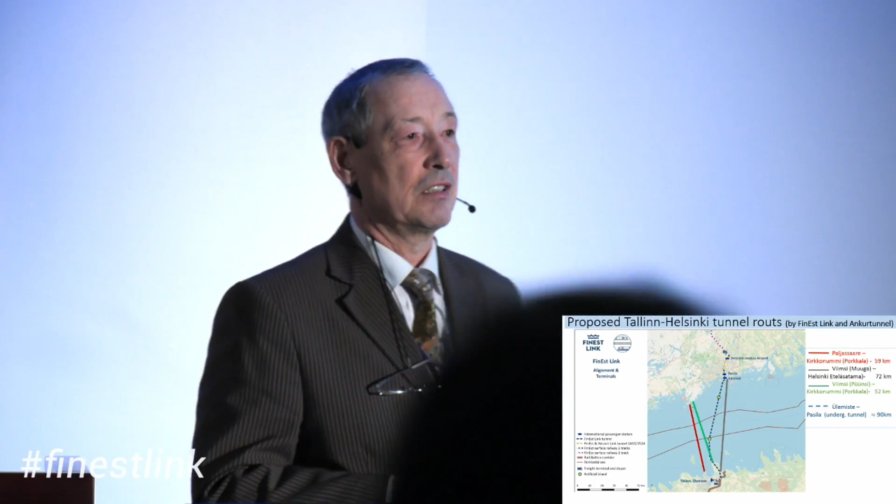And that's why I am trying to highlight some points of the submerged floating tunnel, as you see. It is a submerged floating tunnel, and in other words, it is called Archimedes Bridge. Who knows? And why prefer the submerged floating tunnel? Why? First of all, it can be much shorter than usual bored tunnels in the ground.

I have some calculations here. If we go from Paljassaare, the second option, to Kirkkonummi, it will take 59 kilometers. And from Viimsi, nearby Muuga, it takes 72 kilometers to reach the other shore. And from Viimsi-Püünsi to Kirkkonummi, the green one, it will take only 52 kilometers. And of course, this proposed tunnel is much longer; this real tunnel is about 90 kilometers.

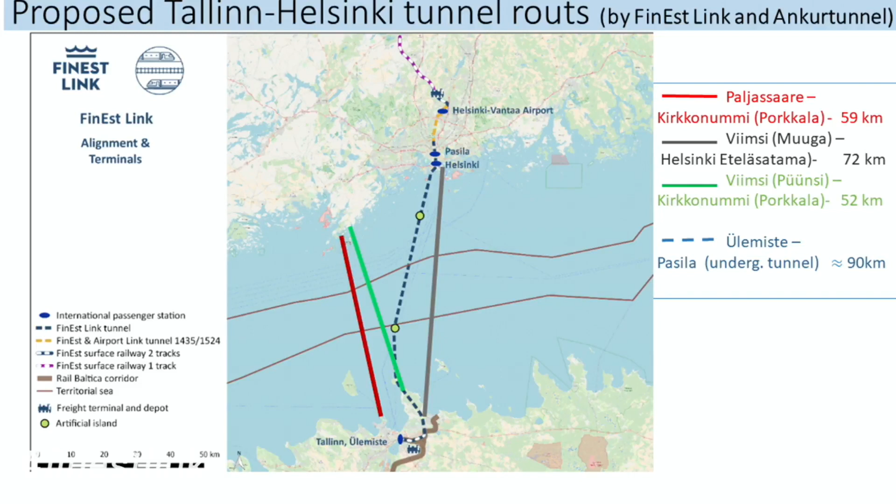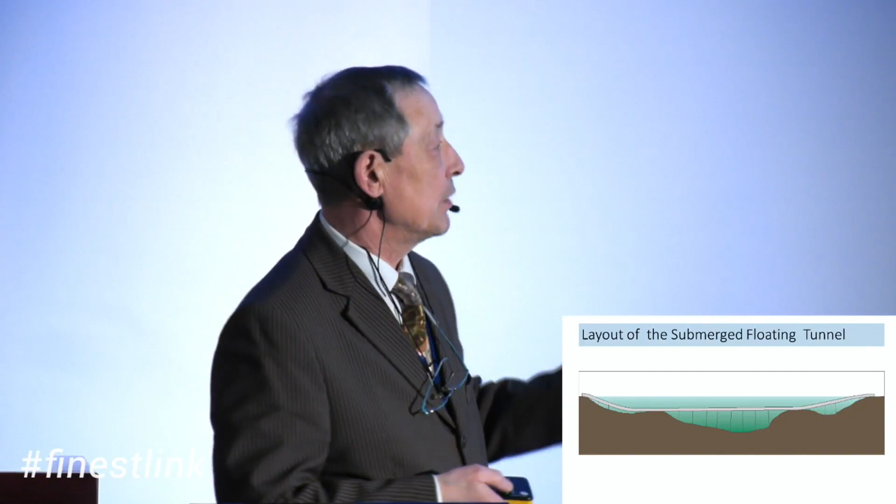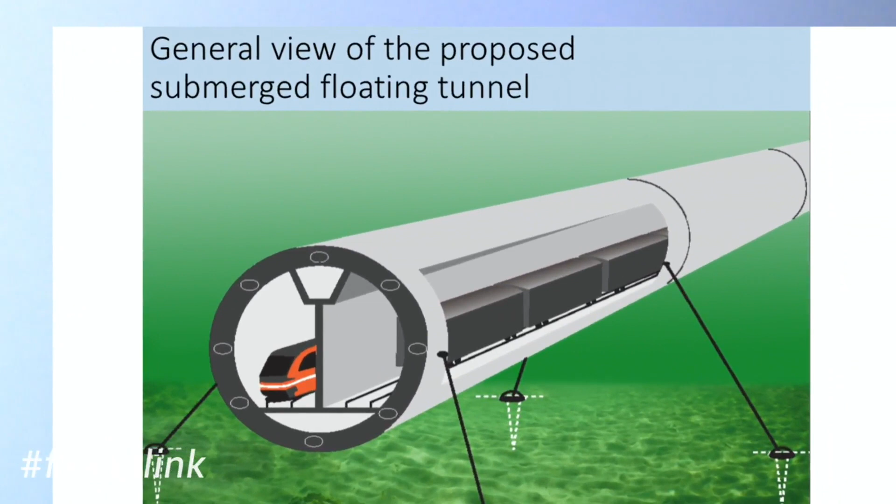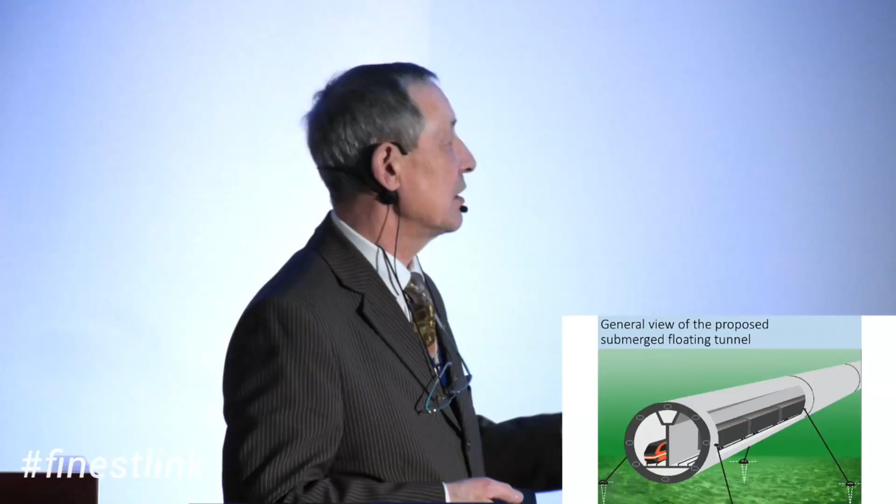This is the general layout of the submerged floating tunnel. It's anchored to the bottom and lies below the water, about 40 meters, but not completely near the seabed. In the general view, an artist's drawing, we can see reinforced concrete modules which create two separate ways, one to Finland, one back, for both passenger and cargo traffic, and a separate tunnel for maintenance and also for escape matters. To fight against buoyancy, the tunnel is anchored to the sea bottom.

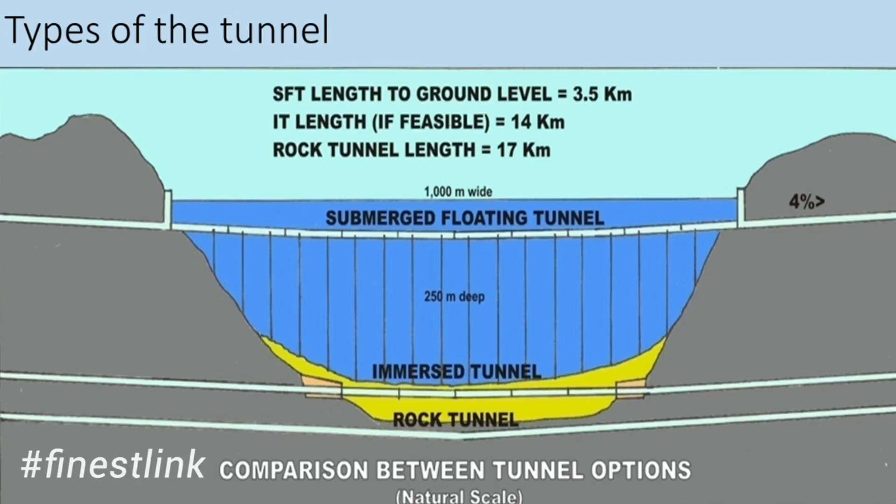I can explain a little bit the difference between the submerged floating tunnel, it's here, the immersed tunnel, it's on the seabed, and the rock tunnel, which is generally planned now. All of them are, of course, underwater tunnels, and there's always the danger of being flooded. And why are underwater tunnels not well known yet?

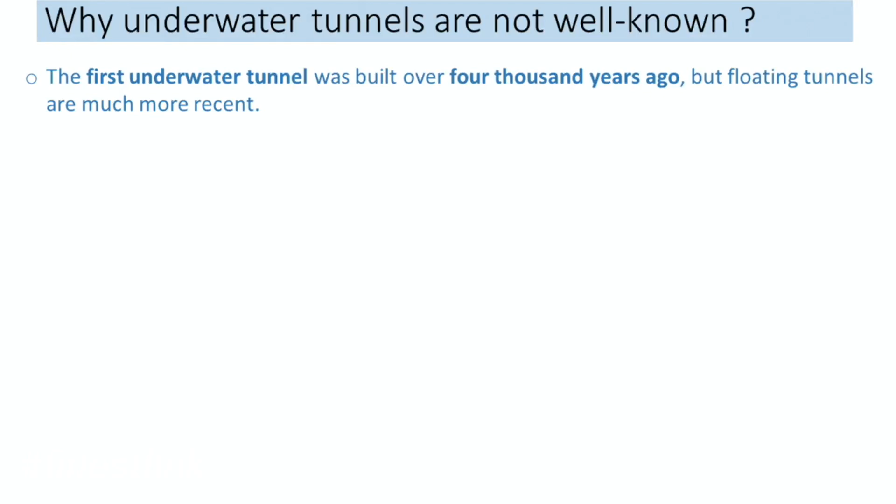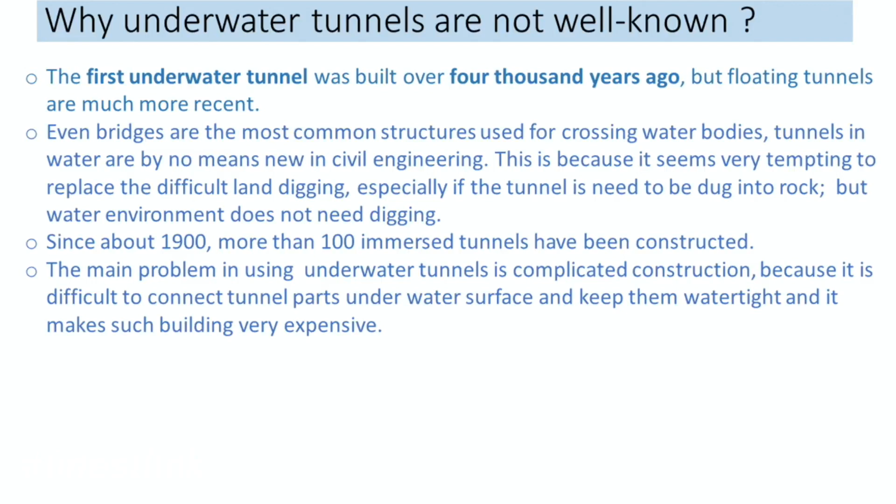The first underwater tunnel was built over 4,000 years ago, but floating tunnels are much more recent. Even though bridges are the most common structures used for crossing water bodies, tunnels in the water are by no means new in civil engineering. It seems very tempting to replace difficult land digging, especially if tunnels need to be dug into rock, but the water environment does not need digging. Since about 1900, more than 100 immersed tunnels have been constructed, usually short ones. The main problem is complicated construction, because it is difficult to connect tunnel parts underwater and keep them watertight, which makes such building very expensive.

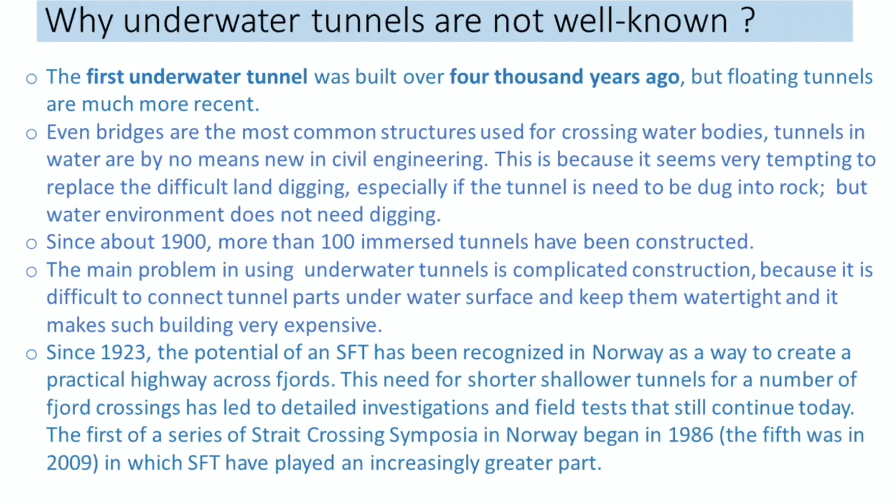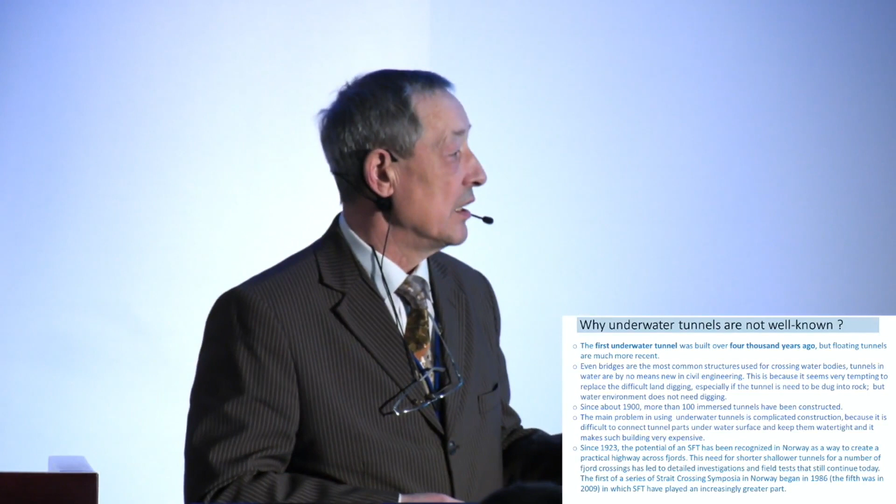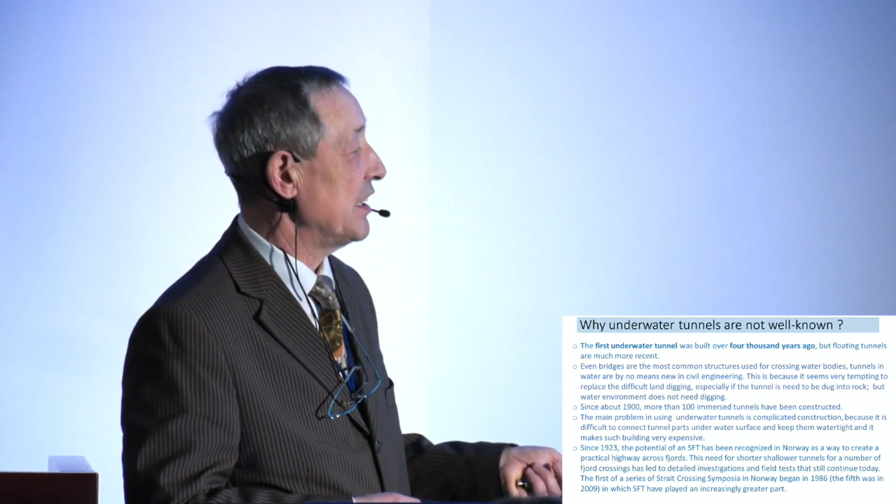Since 1923, the potential of SFT has been recognized in Norway as a way to create a practical highway across fjords. The need for shorter, shallower tunnels for fjord crossings has led to detailed investigations and field tests that still continue today. The first of a series of strait crossing symposia in Norway began in 1986. The fifth was in 2009, in which SFT played an increasingly greater part. Sorry, there are no Norwegians here. Probably they could explain.

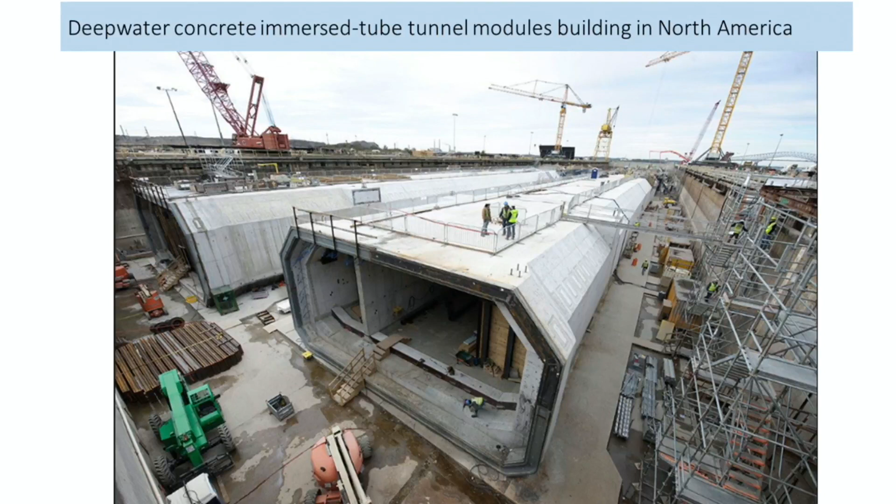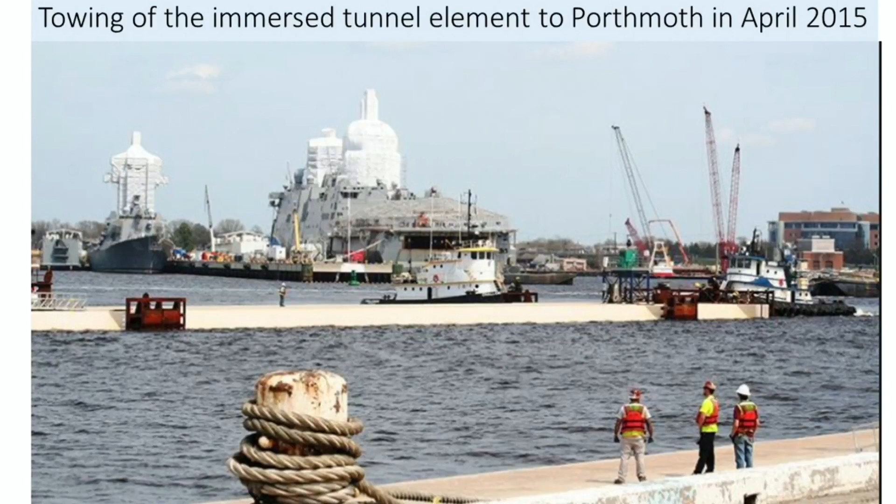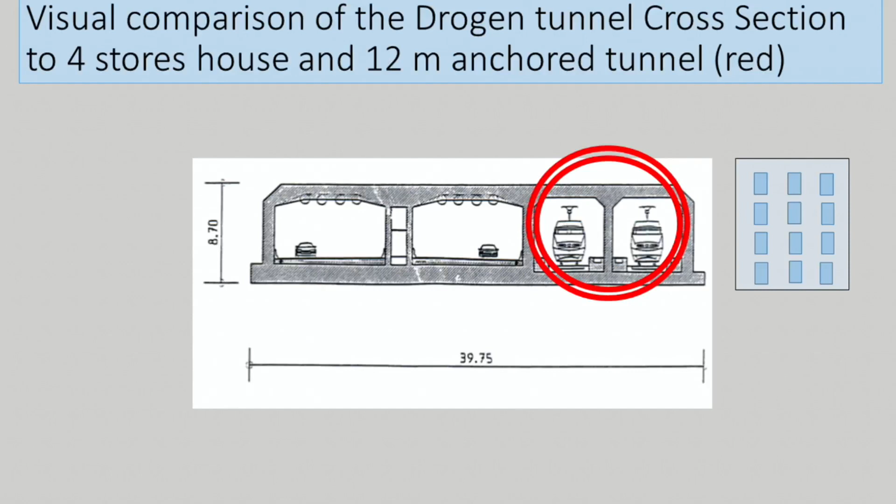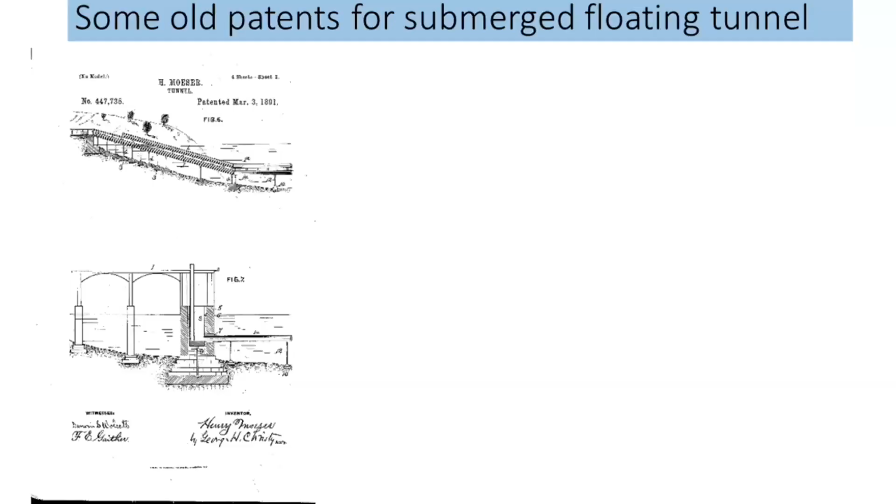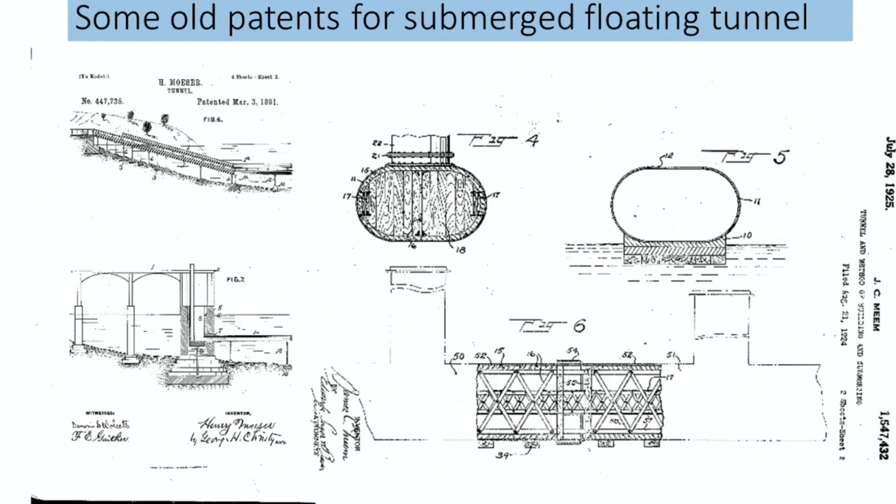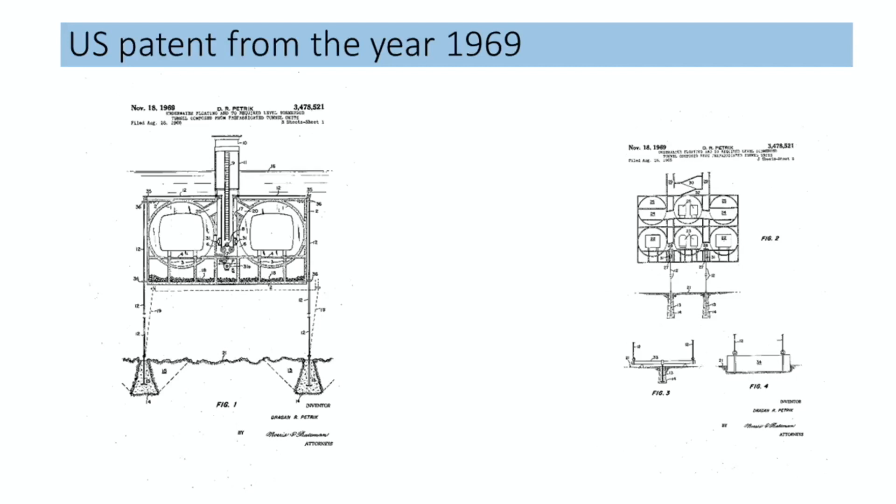Some patents for the submerged floating tunnel have been taken. From 1891 you have seen one of them, the US one, and the second one from 1925, turned a little bit. And the last from 1969 is something like what we are going to propose. And there's quite a difficult construction at the intersection.

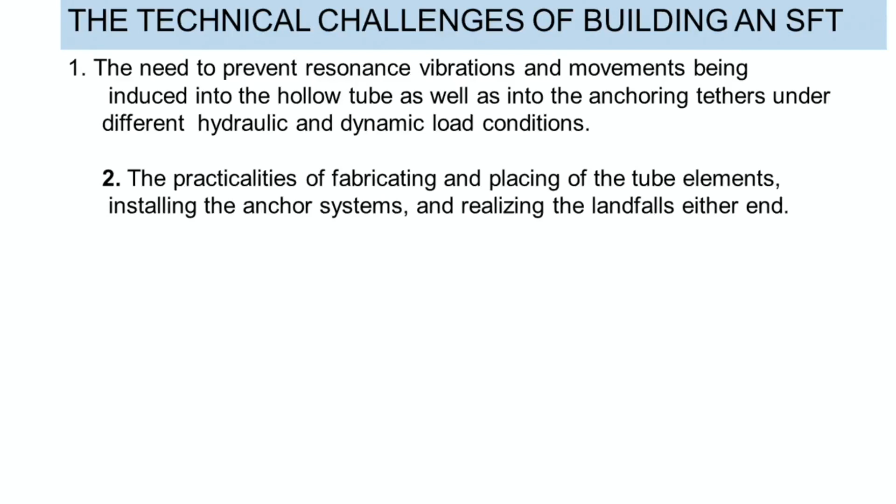The technical challenges of building SFT are, of course, the need to prevent resonance vibrations and movements being induced into the hollow tube, as well as into the anchoring tethers under different hydraulic and dynamic load conditions; the practicalities of fabricating and placing the tube elements, installing the anchor systems, and realizing the landfalls.

And maintenance and repair of submerged infrastructure, addressing the highly improbable but perhaps possible event of a submarine or sinking ship colliding with the suspended tube. Of course, anchoring, someone lowering an anchor onto the tunnel, that's the problem. And in general, public perception and operational safety: how to gain the confidence of the public and assure the safety of the infrastructure to the clients and the insurance industry.

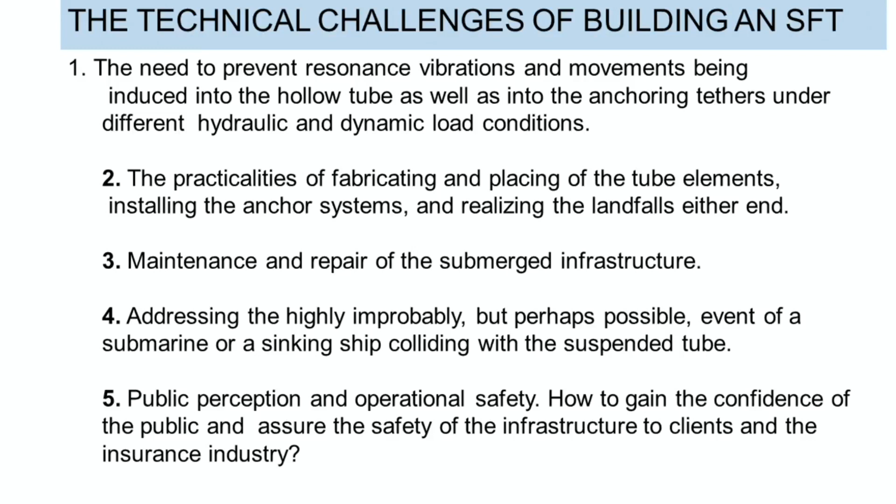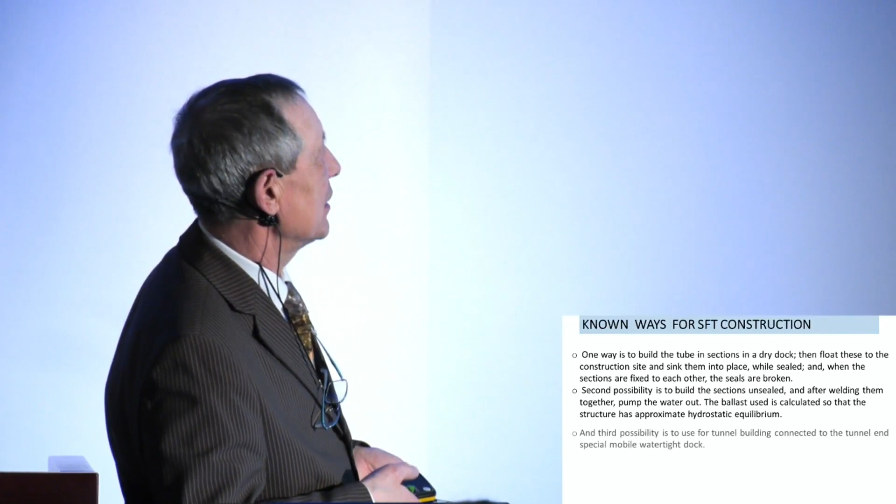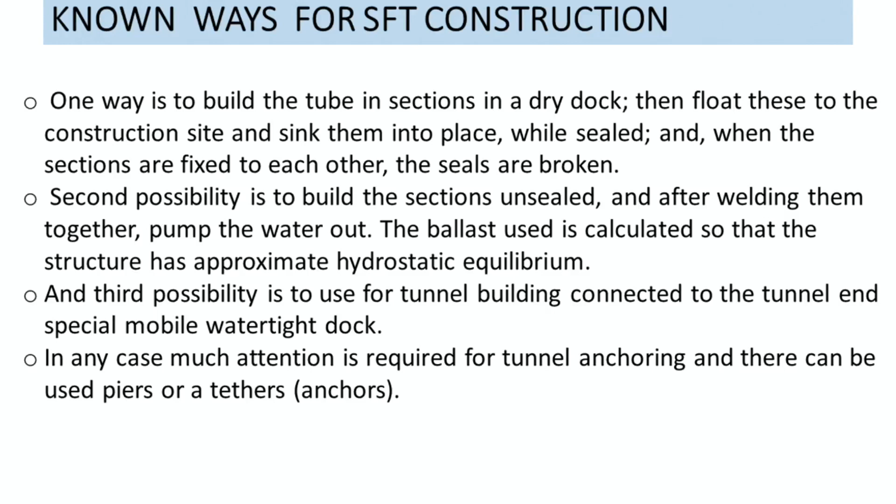Known ways for SFT construction. I have to rush, I will jump because the time scale is very tight. A third possibility is to use a tunnel building connected to the tunnel end special mobile watertight docks. It is also used. But in any case, much attention is required for tunnel anchoring, and piers or tether anchors can be used. And the last one, the best way, is to submerge the tunnel like a gas pipeline.

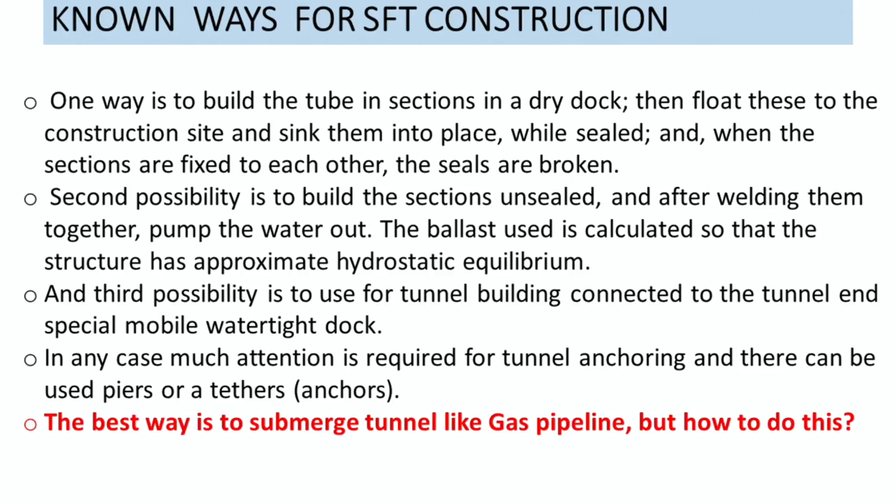Gas pipeline, but how to do this? It's different to submerge a steel tube 2 meters in diameter or a 10 meter or larger concrete tube. It's a question. And some known future projects of submerged floating tunnels.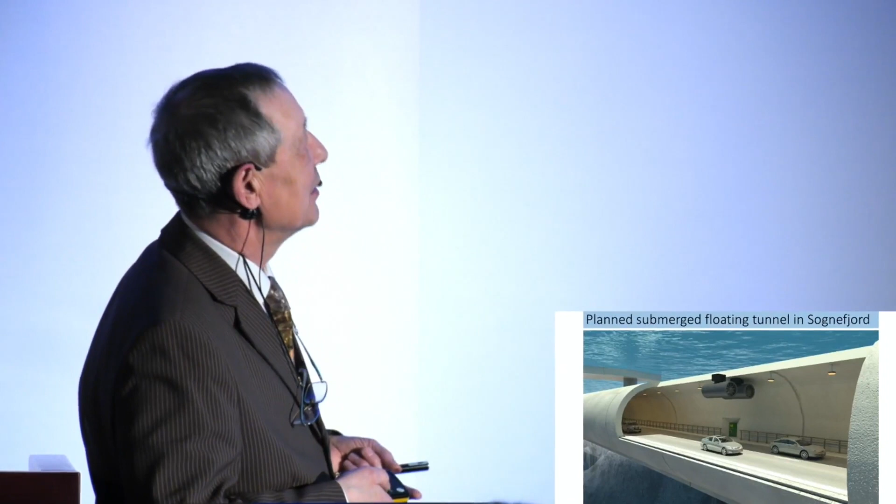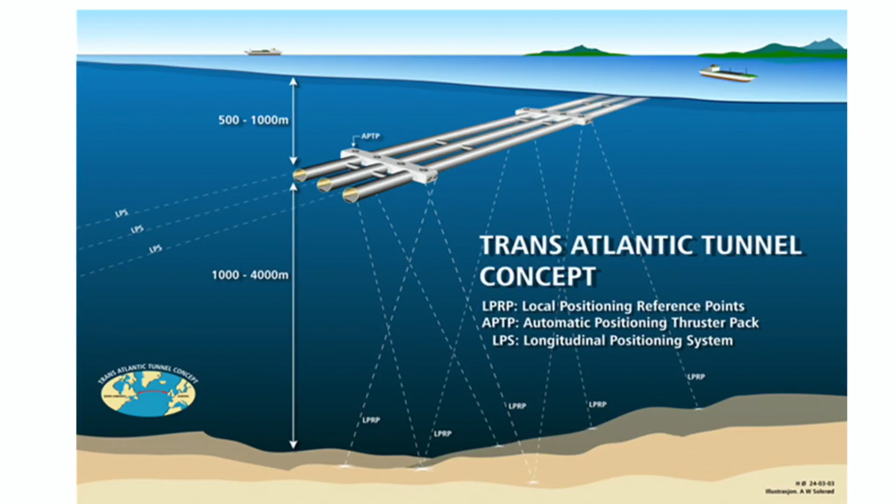I am explaining that I am not very fantastic here. The plan in Norway, on floats, anchored to the seabed, and even a transatlantic tunnel is proposed. You can see transatlantic from the UK to America. So those are ideas.

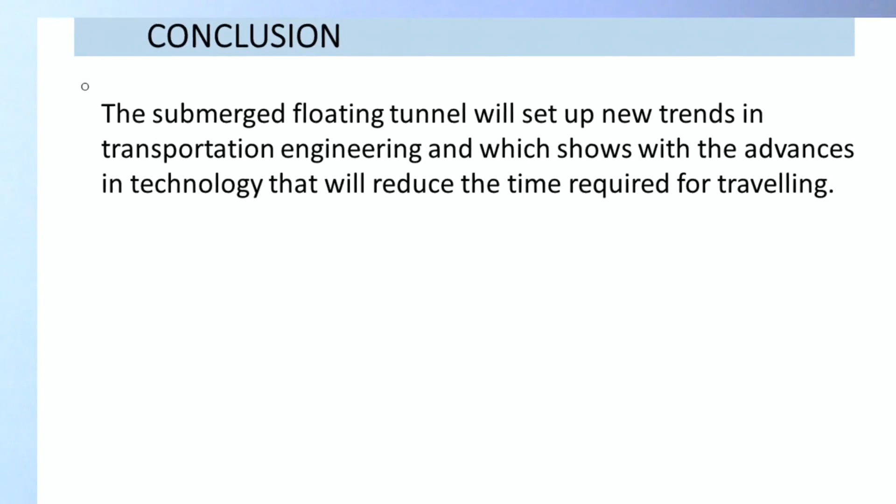Conclusion. This is not the full presentation, but the submerged floating tunnel will set up new trends in transportation engineering, and shows that advances in technologies will reduce the time required for traveling. For wide and deep crossings, a submerged floating tunnel may be the only feasible fixed link, replacing present-day ferries and providing local communities with new opportunities for improved communication and regional development.

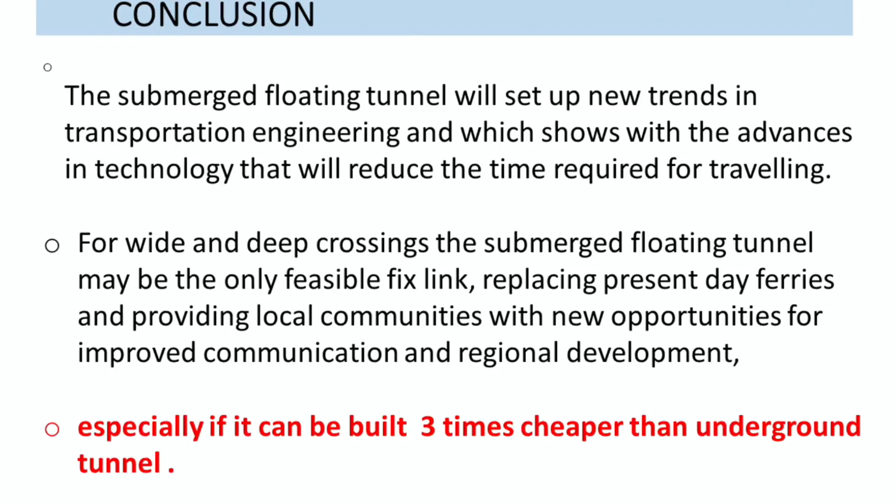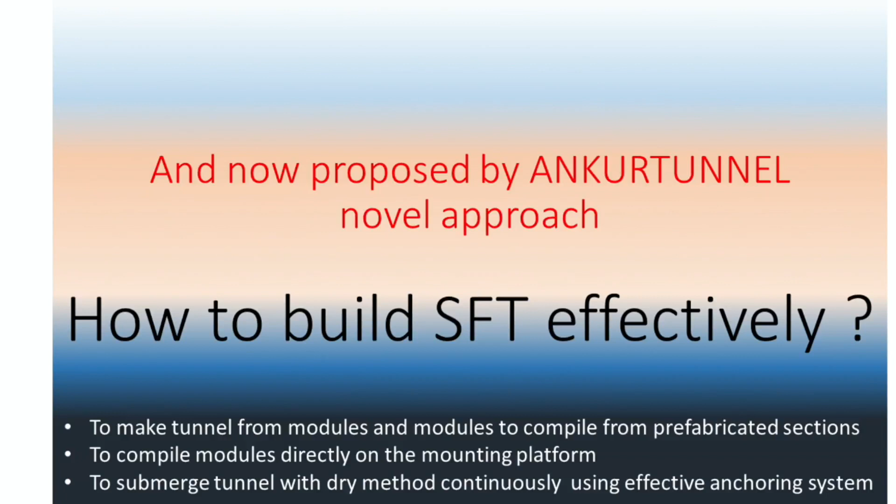And especially if it can be built 3 times cheaper than an underground tunnel. That's a point. And now a novel approach is proposed for how to build SFT effectively. First, to make the tunnel from modules, and compile modules from prefabricated sections. Second, to compile modules directly on the mounting platform. And third, to submerge the tunnel with dry methods continuously using an effective anchoring system.

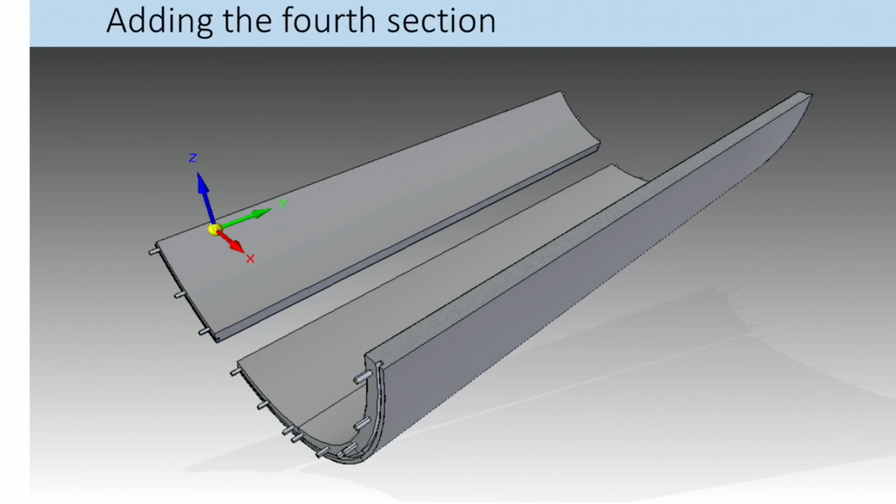And such prefabricated parts of a module. 5 parts, 2 sections to connect, 2 connected, 3 connected. Fourth section adding, 4 sections already, 5 sections together, 6 sections together, 8 sections, and a module with inner walls. It separates and makes 3 different tunnels in one.

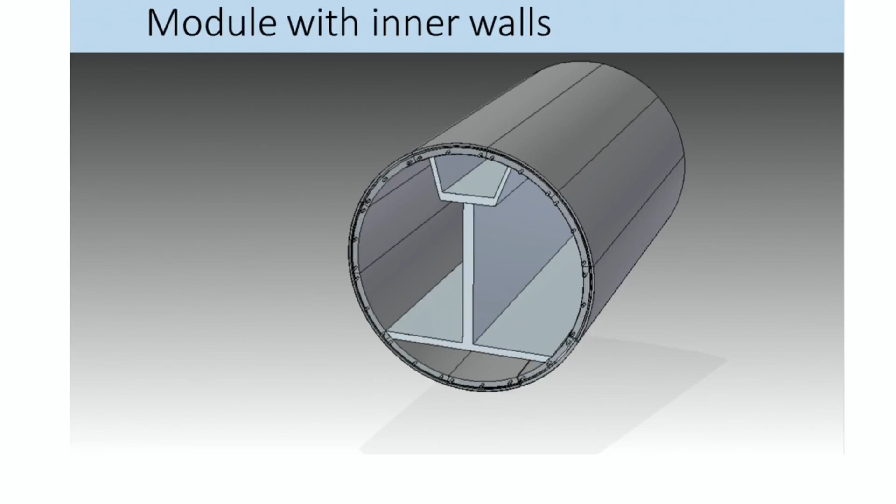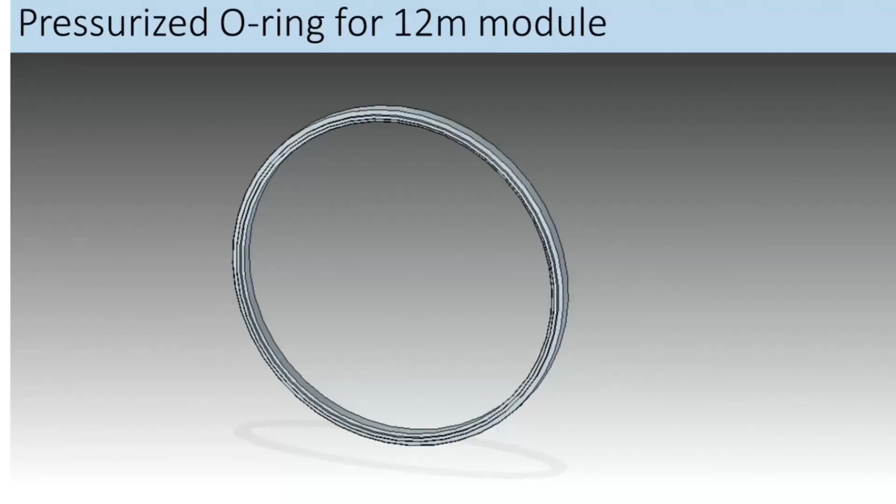An important thing is sealing of those modules between each other. For this an O-ring is used, like a car tire with pressure. This is its section. And in real scale, it could look like this, half a meter, connecting modules.

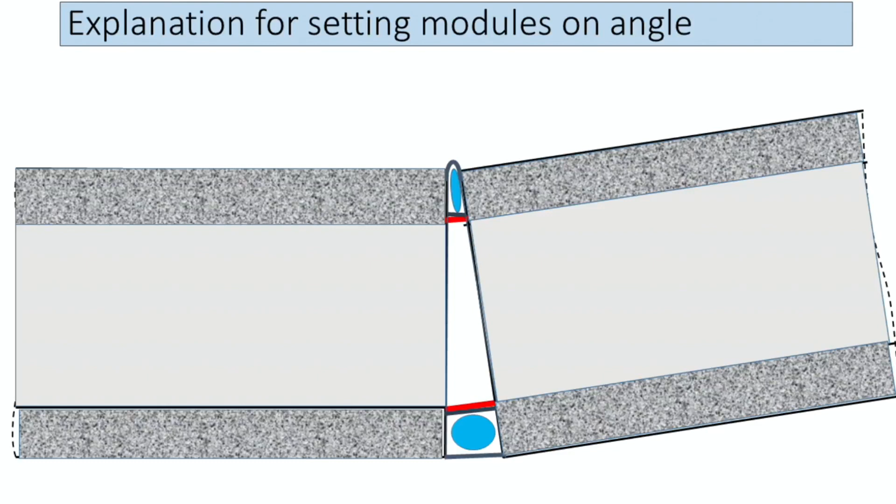And the important thing is to understand how to bend the tube. It's important to understand this. This flexible sealing makes it possible to adjust the upper sides closer to each other, and it makes the necessary angle to submerge from the platform. And the idea, to see this, is like this. And its section is shown here.

It's this profile sealing, O-ring, and so on. By the way, it's useful to cover this concrete construction with a plastic skin for additional watertightness.

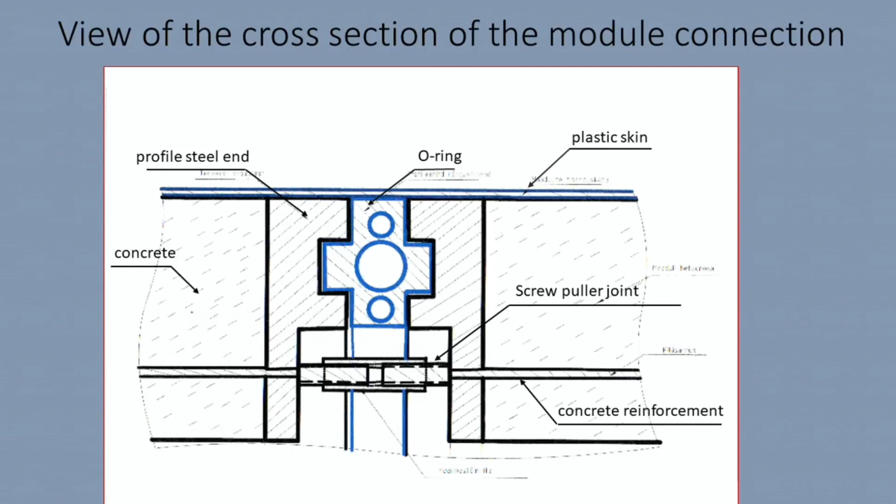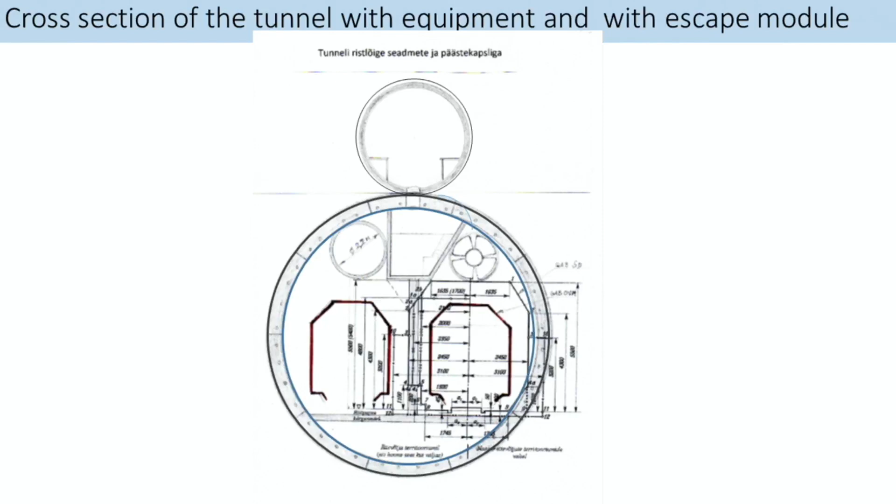It's a cross-section, and the important thing to see here is this escape capsule or module on the upper side, which passengers can reach, disconnect from the tunnel and float up to the surface. It's of course not for everyone. It's probably necessary about every 2 kilometers. It's a novel proposal.

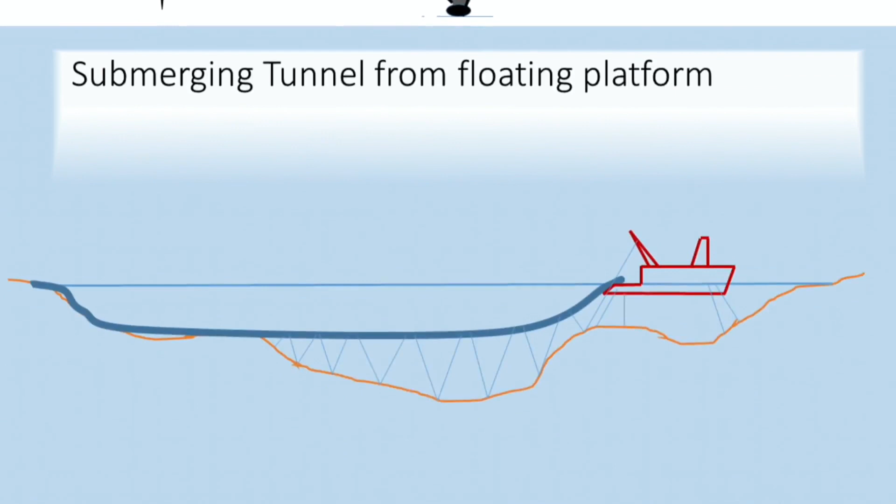Its anchoring system is also thought through a little bit: it will be anchored by pulling a continuous rope or wire. That's the idea. And the full picture is like this. This escape module is shown here. People are sitting inside, we can see, and modules with this escape module. Let's separate.

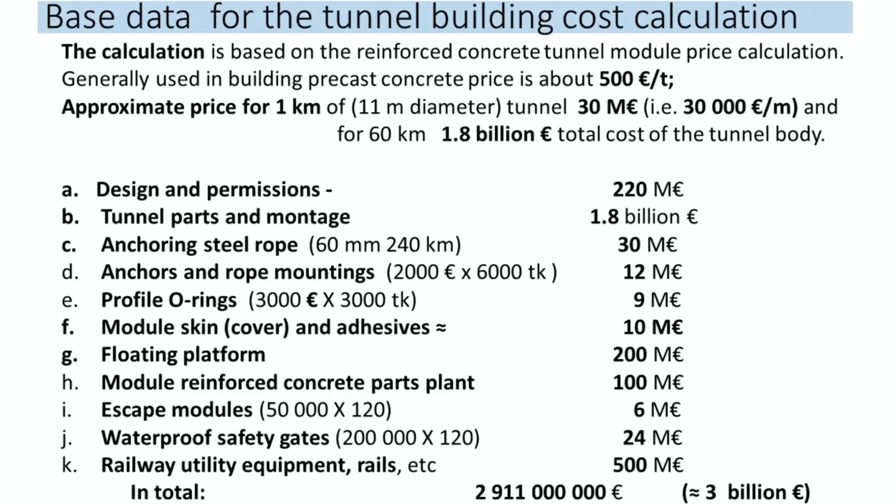These are some calculations I've done. I will not get stuck on every detail, but generally I took the precast concrete building price of about 500 euros per ton for calculation. It gives this tunnel plus montage only about 2 billion euros. It's not very expensive. And for this we need a platform for building it, a platform with this anchor drilling tower.

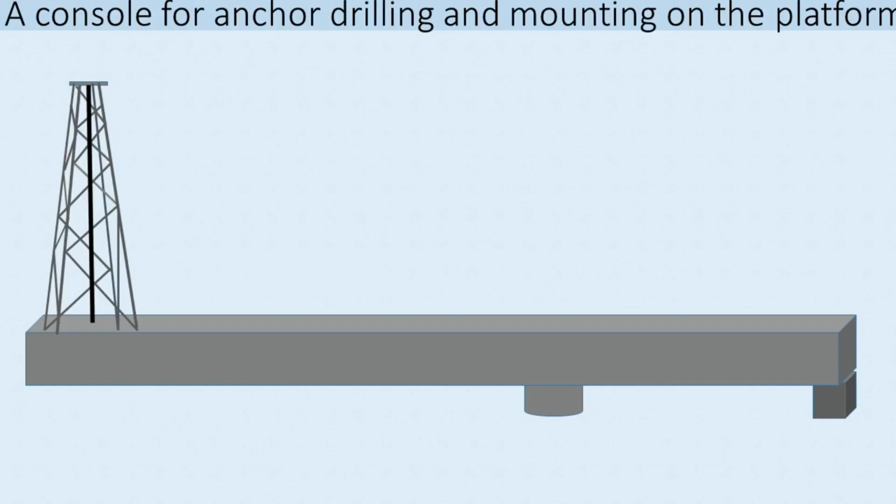This is a conventional petrol boring tower. It's placed on a console. It can move far from the ship. It's a picture of this, and I can show that it's already used with these 4 legs to stand in shallow waters.

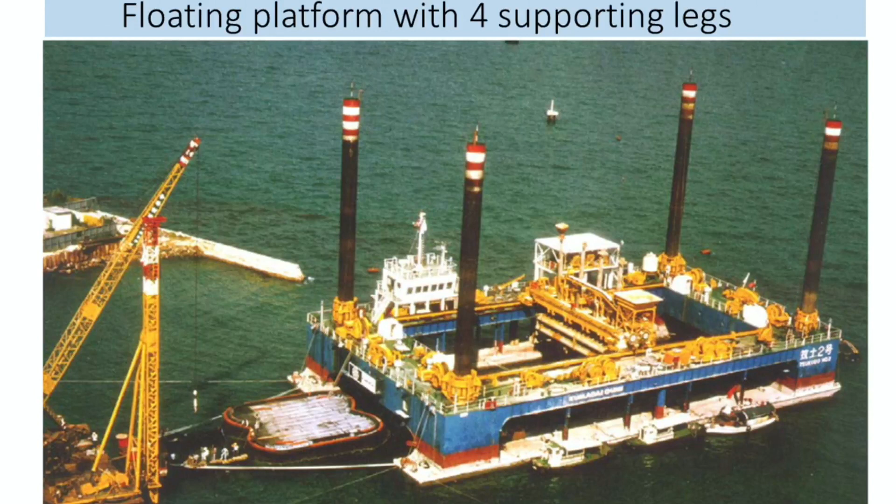And arguments in support of the floating tunnel are important. A future project based on modern technological capabilities and needs, which upon successful launch also includes application in the rest of the world, with a high-tech line for the production of tunnel parts remaining in Estonia and Finland. Worked-out know-how and successful patent rights would provide long-term profits.

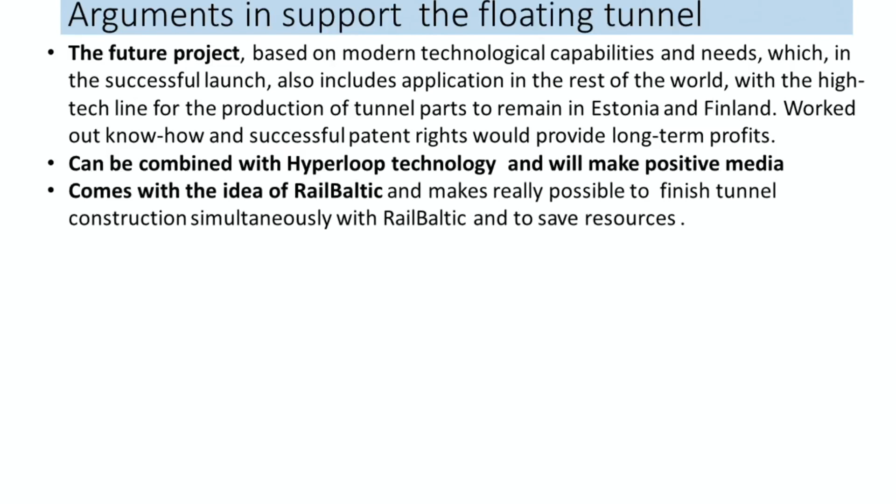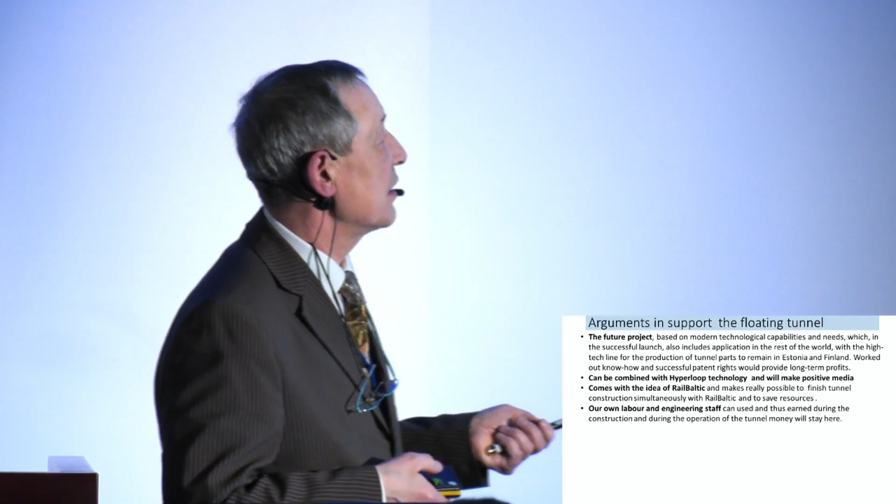Second, it can be combined with Hyperloop technology and will make positive media. Such a novel construction comes with the idea of Rail Baltic and makes it really possible to finish tunnel construction simultaneously with Rail Baltic and to save resources. As I said, it's faster to build. Our own labor and engineering staff can be used, and thus money earned during construction and operation of the tunnel will stay here in Estonia and Finland.

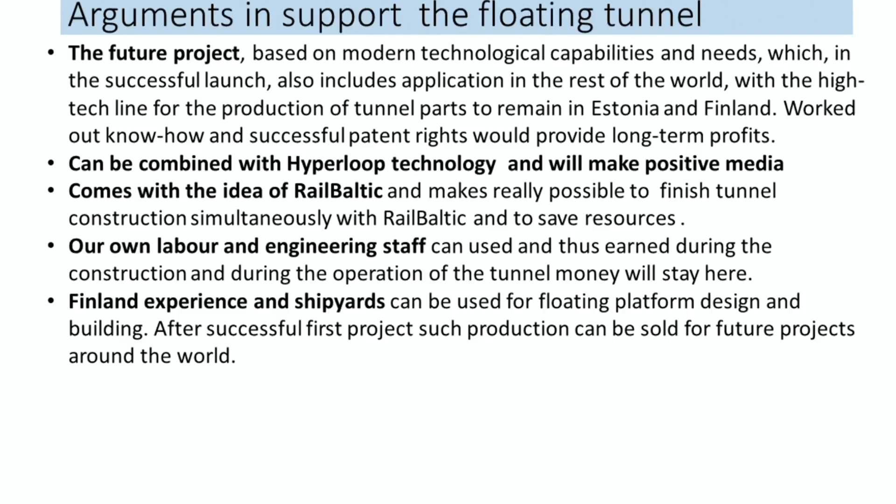Finland's experience and shipyards can be used for floating platform design and building. After a successful first project, such production can be sold for future projects around the world. Investments to the northeast of Estonia: there are good possibilities to create these module parts. All resources are available. It will remarkably reduce local unemployment and thus also reduce national security risk.

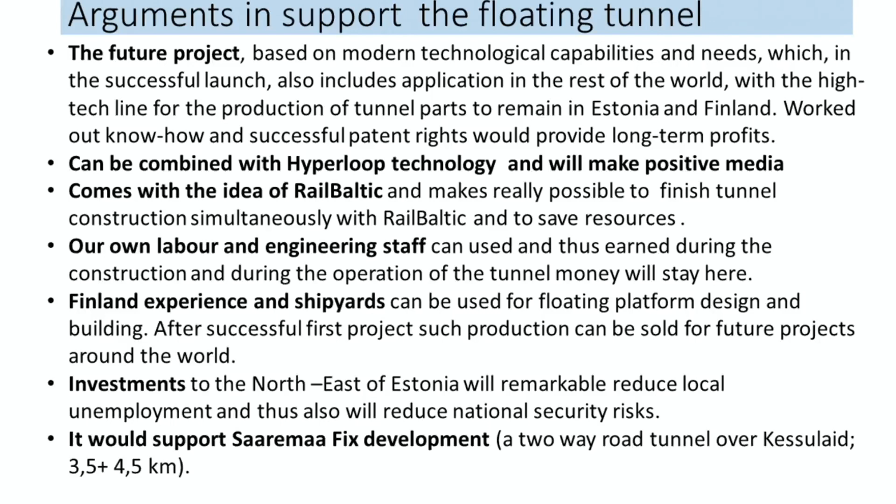It's a political question. And I expect it can also support Saaremaa fixed link development, a two-way road tunnel over Kessulaid, 3.5 plus 4.5 kilometers. So that was my presentation; we saw what a submerged floating tunnel is, or an Archimedes bridge upside down. You can see here, a bridge upside down.

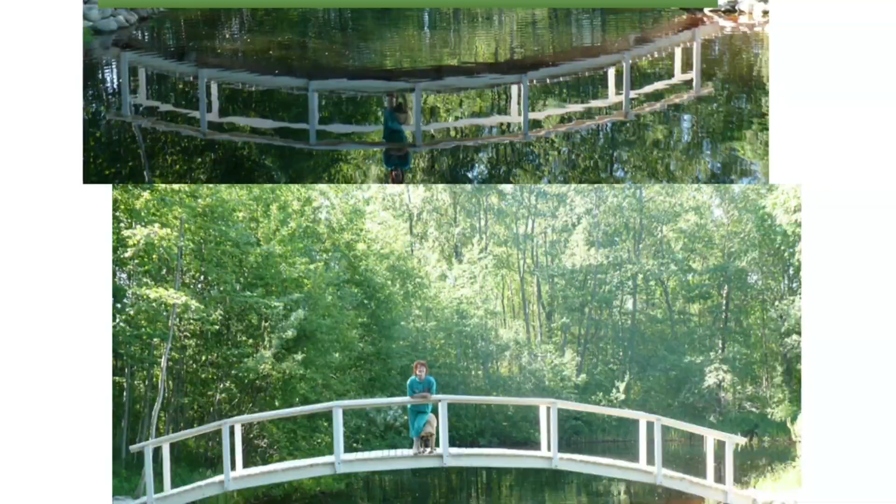And thank you. And this bridge is built with my own hands. My wife, my dog. Thank you.